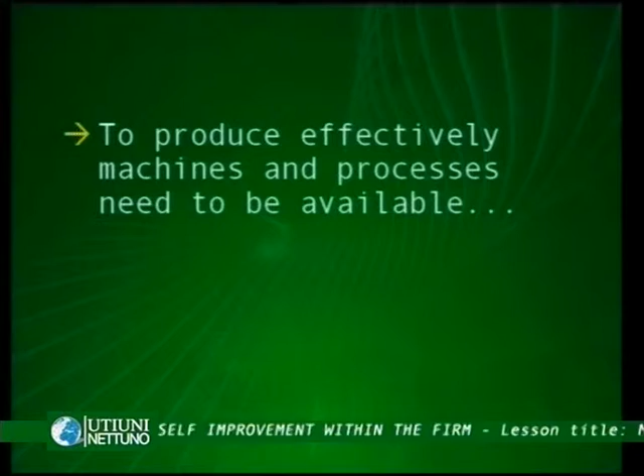Why is maintenance important? To produce effectively, machines and processes need to be available. It seems very obvious, but to be competitive, to be efficient, to build your capacity, your machines need to be able to do what they are supposed to do when they are supposed to do it. To achieve this, they must work and work well when they are needed.

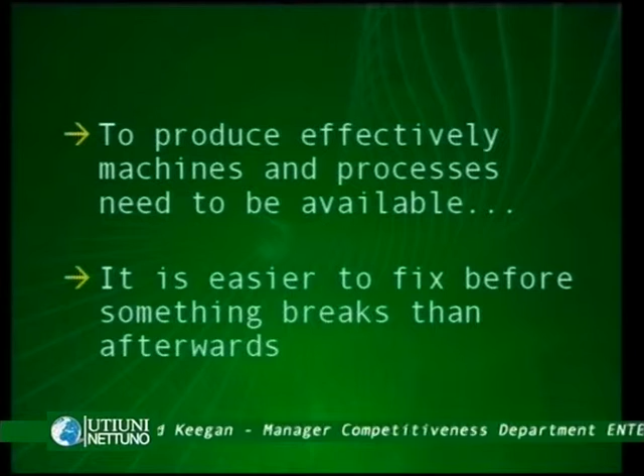It is easier to fix before something breaks than afterwards. If you take the simple example of your bicycle, it is often easier to adjust the tension of the drive chain before it gets caught in the wheel than it is afterwards. It's certainly less messy. The same idea applies in industry. If we can adjust our machinery and keep it running properly before it breaks down, we can be more effective and efficient, and spend less time trying to fix problems as opposed to making sure they don't happen in the first instance.

Adjusting is always cheaper than replacing. If it's possible to make small adjustments to a machine or a process or a piece of equipment, it is much cheaper than buying new parts, which are often difficult to get. So it's much easier to adjust than to replace.

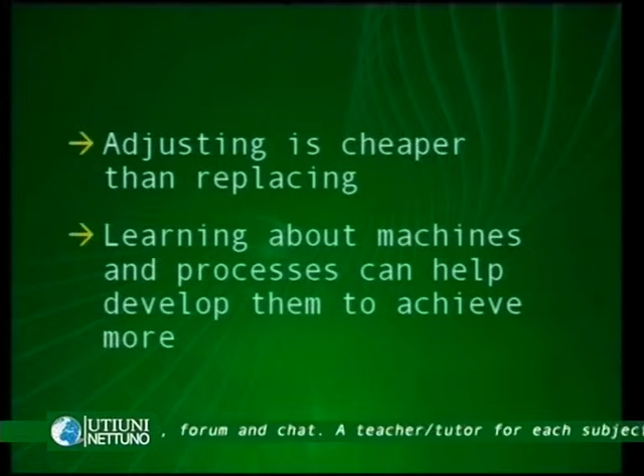Also, learning about machines and processes can help develop them to achieve more. Most machines are built by machine makers, but very few of these machine makers have the experience of running machines in a production environment. As you and your team build your capacity, your ability and your understanding, it's quite possible that you will find ways to improve the machinery to make it better than that delivered to you by the machine maker, because you will have increased your understanding of how the machine should work, as opposed to how it was designed. The only way to achieve this, however, is by learning about your machinery and trying to understand its concepts and its basic fundamental structures.

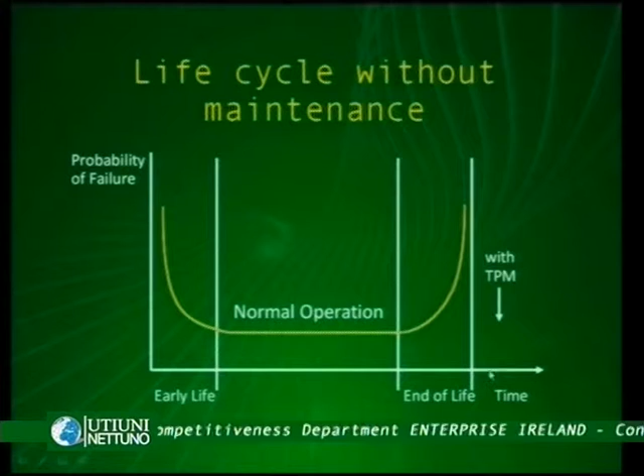With a concept called total productive maintenance, basically the use of good maintenance practices, we can reduce the probability of failure over time. In our next graphic, we will describe this.

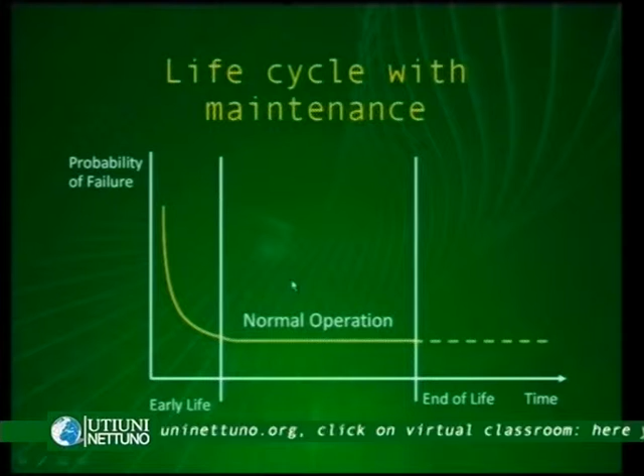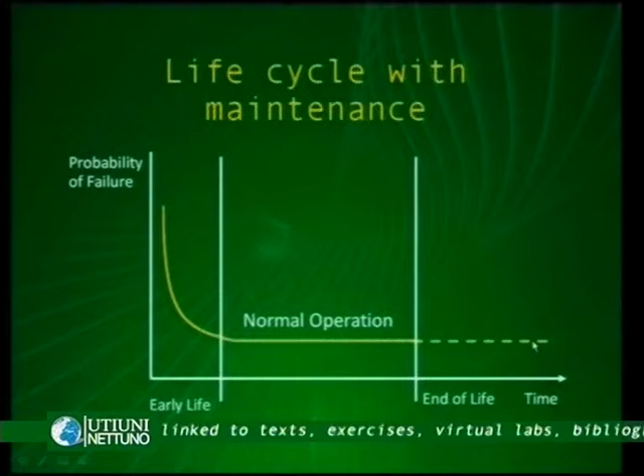Once again, we may have the situation of early stages of failure, high levels of probability of failure in the early stages of life of the machine or equipment. We will move into normal operation, but with good maintenance, it becomes possible to extend the life of the machine and the equipment to a greater degree. We call this the life cycle of the machine with maintenance.

On my first visit to Japan many years ago, I visited a company called Nissan Diesel, and I was surprised to see in their machining halls very many machines that I recognized from my early days in university. The only difference with these old machines was that they had been equipped with new measurement equipment and simple devices to allow the machines to run more effectively and efficiently with less input from the workforce.

So in actual fact, this company in Japan had found a way to extend the life of their machinery, plus also to improve its capability, because they had taken the time and the effort to develop their understanding of the machinery, as well as the concepts, as well as the possibility of making simple adjustments and additions which extended the life and the efficiency of the machinery.

There are some key principles of good maintenance. The first of these is cleaning. If an environment is dirty, it is hard to see where a problem may be arising in a machine. If a machine is leaking into a dirty environment, it is very hard to identify the source of the leak. If it's leaking, it's not operating the way it is supposed to operate.

So if we can start our proper maintenance journey by cleaning our environment, by cleaning the machinery, by cleaning the space around the machinery, we begin to get an understanding of our machines. We begin to get an opportunity to identify when something is going wrong, before it fails. This in turn helps us to adjust rather than having to replace or fix something that is broken.

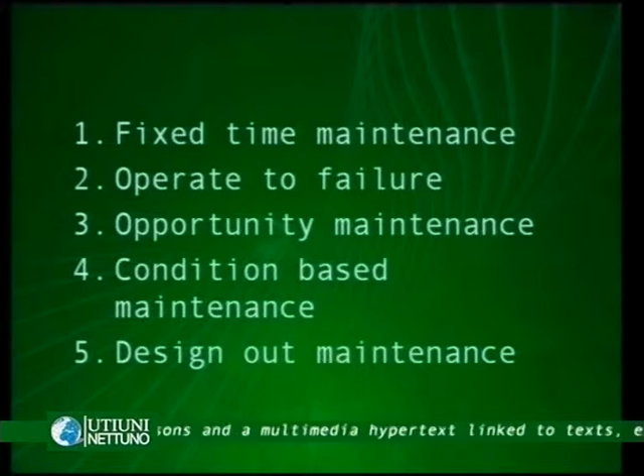Based on how the machine is performing, certain activities and actions can be done to improve the overall performance and life cycle of the machine. The fifth key type is design-out maintenance. As the name suggests, it relates to designing maintenance out of the cycle of the machine's operations. We will deal with these 5 types of maintenance in some detail during this lesson.

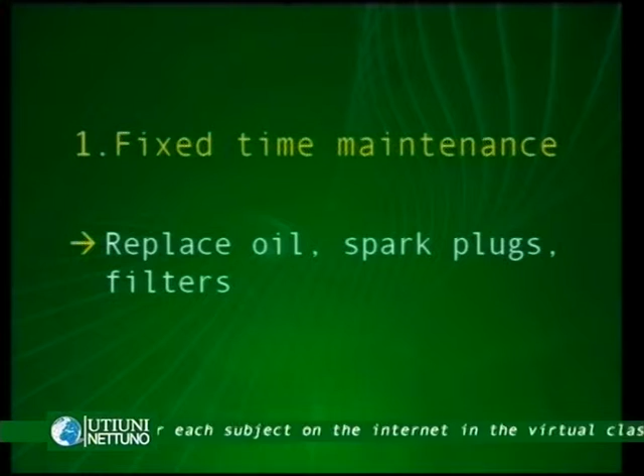The first of these types of maintenance is fixed time maintenance. We would understand that with our cars, with our motorcycles. We would replace the oil, the spark plugs, the filters at a fixed time or a fixed distance. Annual services — we understand the concept that a vehicle gets serviced annually. Oil gets replaced every 6 months or after a certain mileage.

And on this basis, if we take it into our manufacturing environment, we might do an annual maintenance of a machine. We will have certain activities that will be done to the machinery or the equipment every year on an annual shutdown. It's very normal in process industry or in the food sector.

So the machine gets certain items changed, adjusted, replaced on a time-based level.

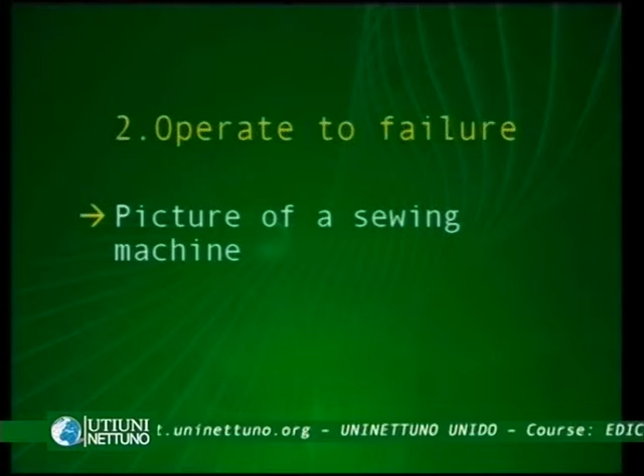In an operate-to-failure environment, it's typically used in a situation where many simple pieces of equipment can be replaced quickly. Imagine the picture of a sewing machine in a sewing factory: the machine is simple, small and light, and can be replaced very quickly. Typically, a sewing factory will have a number of reserve machines that can be put into place if a machine breaks down. The broken machine is taken aside, repaired, and brought back to operating condition, but the operator has a new, replaced machine to work with.

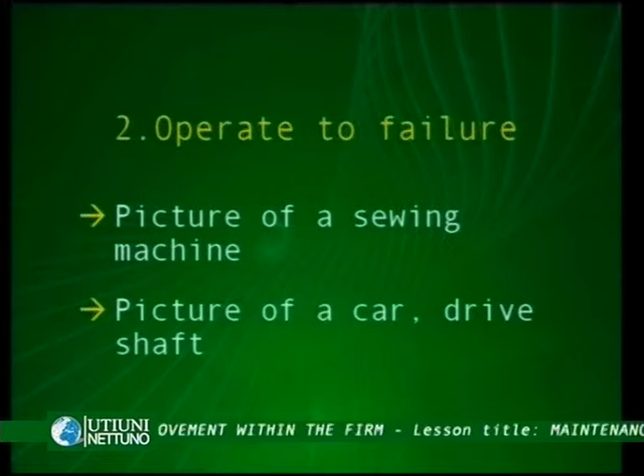If you imagine the same situation with your car, it is unlikely that you would replace a drive shaft at a particular distance or particular time. You would most likely drive the car until the drive shaft failed, until you became aware that it was going to fail in service. In that instance, you would replace it because it had failed.

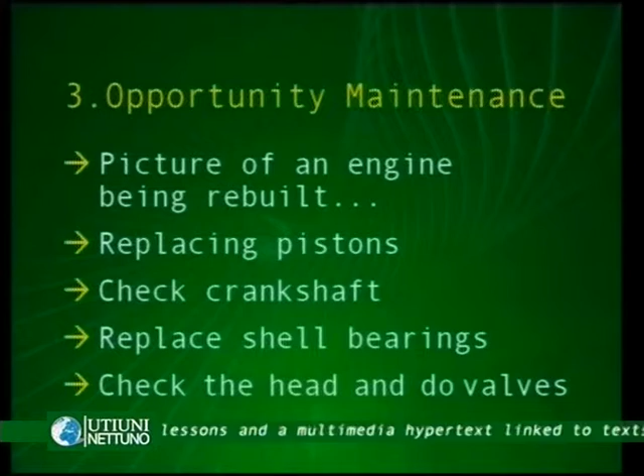The third level is what we call opportunity maintenance. Sometimes a part needs to be replaced because it is broken, and sometimes a part has gone to the end of its life. Imagine an engine being rebuilt: you may take the opportunity, while rebuilding the engine, to also replace the pistons, check the crankshaft, replace shell bearings, check the head, and do the valves. Because you have the engine removed from the car, there are probably many other tasks or checks you may choose to take on, since you've already removed the engine. You're taking the opportunity to do these other jobs when the engine is removed and disassembled.

If you take the same example into industry, if you're working on a significant machine during its annual changeover, you may decide to do a number of different checks at that time. You're taking the opportunity to do additional work because the machine is available to you and has been disassembled.

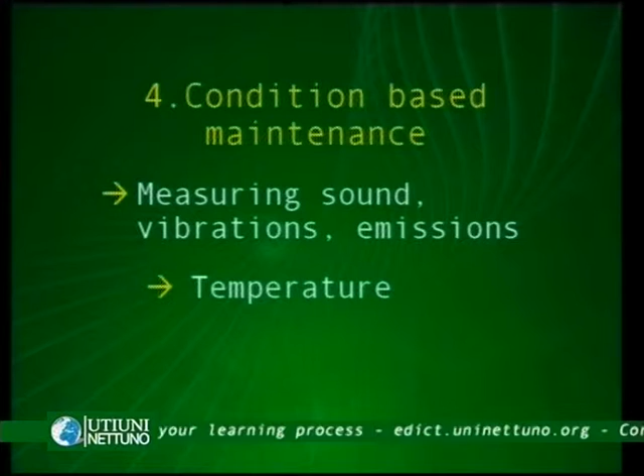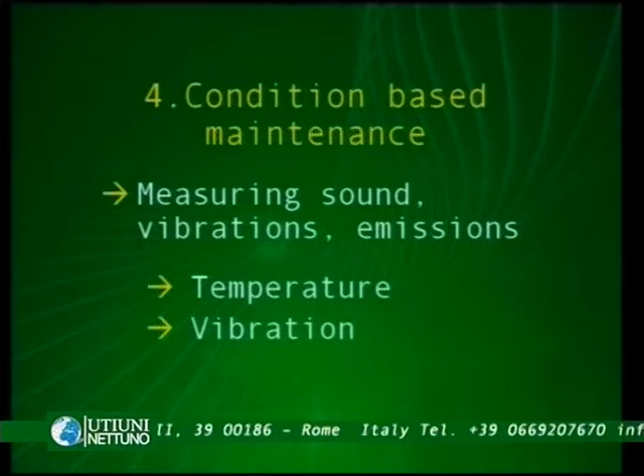The fourth type of maintenance is called condition-based maintenance. In this type of maintenance, it's about the condition of the machinery. You're moving into a reasonably sophisticated environment, beginning to look for sound, vibrations and emissions, temperature, vibration and lubricant condition. You begin to try to understand what the optimal performance level for the machine is.

In the simplest of terms, if you watch good engineers walking through a factory, you will often see them use the tips of their fingers on the frame of a machine to feel for vibrations. Half the time they don't even know they're doing it. But you will notice good, capable maintenance and engineering staff walking through a production environment, listening for strange noises, checking vibrations on machines, and being aware of changes in temperature as they walk past. They actually care about their equipment, they've come to know and understand it, and they are sensitive to changes.

Many years ago, I was working with Nestlé on a sweet-making machine for bonbons. The ladies who worked on that machine every day could tell me, as the engineer, that there were issues arising in the machine long before we, as the engineering team, would have become aware of it. This was because they noticed changes in the sound, the vibration, the smell or the feel of the machine. It's very important to be open to your people working in the factory, so they can share things with you. They may not know the exact technical term or issue with the machine, but they might well help you identify a leak, a noise, a corrosion, or some other change in the machine, giving the maintenance engineering team the opportunity to adjust it before it breaks.

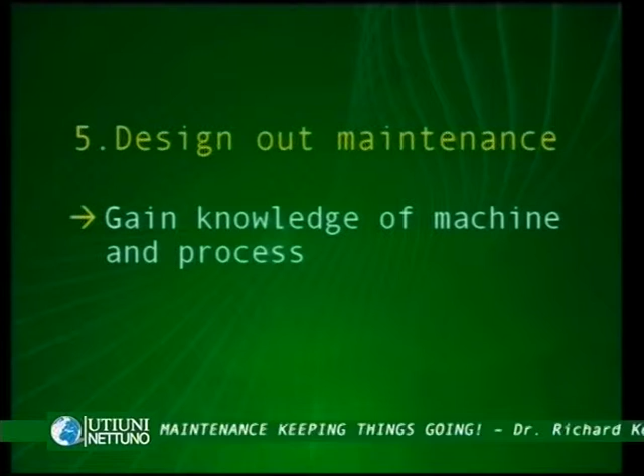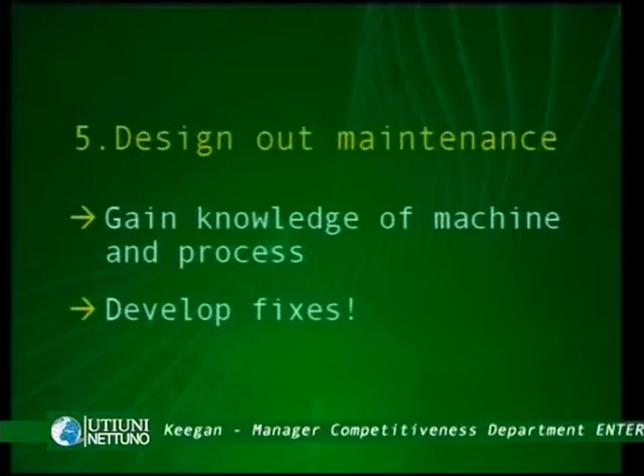Design out maintenance, the fifth type of maintenance, refers to designing out maintenance. This can only be done as you gain knowledge of your machine and your process. I referred earlier to the point that machine makers do not usually have much experience running machines, whereas those of us who work in a production environment have a lot of experience in the day-to-day use of the machines and how they operate within a manufacturing environment.

As we gain knowledge of our machines and processes, we may find things that break on a regular basis. If we can communicate with our machine makers, we can give them information so they can design out those problems in the next iteration of the machine.

If we have the skill, ability, and resources within our own operation or a local supplier of parts and components, it may be possible for us to create pieces of equipment or replacement parts that are stronger or more capable than those supplied by the original machine maker. It's only possible to do that if we gain knowledge of our machine and our process.

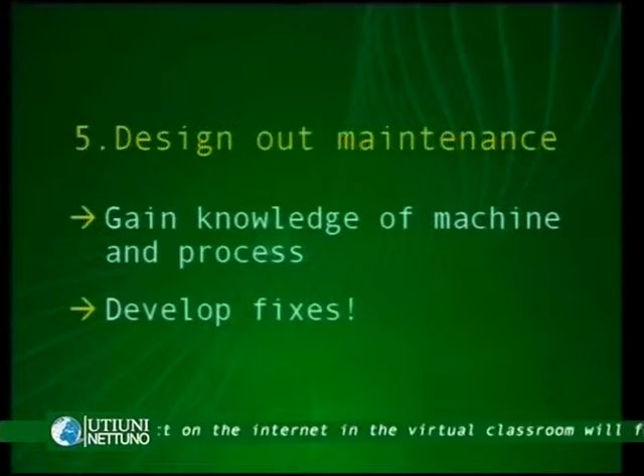That in turn gives us the opportunity to develop fixes, which gives us the opportunity to improve the performance of our plant, equipment, and effectiveness and competitiveness, while building the capacity not only of our equipment but most importantly of our people - our engineering, our maintenance people, and our local supply base. This development of fixes can give us a significant strategic advantage over companies who choose only to keep and run machines as delivered by their makers.

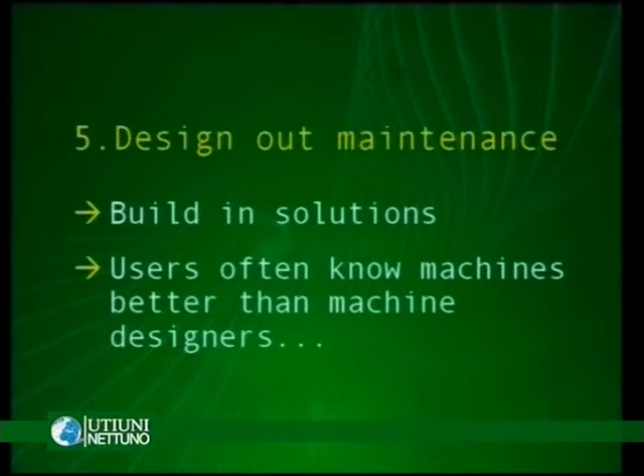As we build this knowledge, we get the opportunity to build in solutions. We will certainly know more than the people who design the machines. The potential could arise where it becomes possible for you to share your idea with the maker of the machine, or even to sell the concept to them. But it all comes from a basis of knowing your machines, understanding your processes, and building your capability to run the machines effectively and efficiently.

We will now talk about organisation structures and how to organise your people in the maintenance and engineering areas.

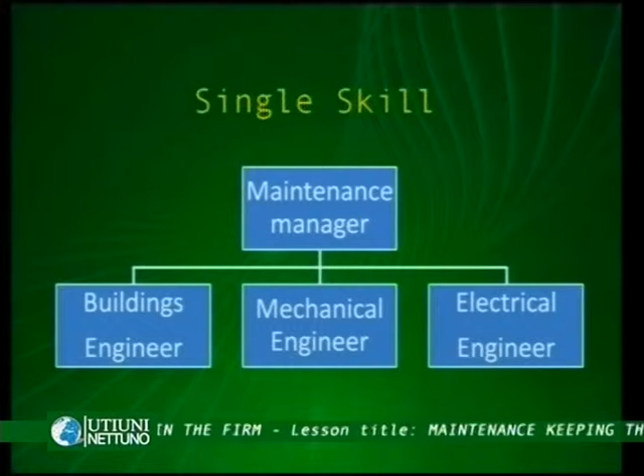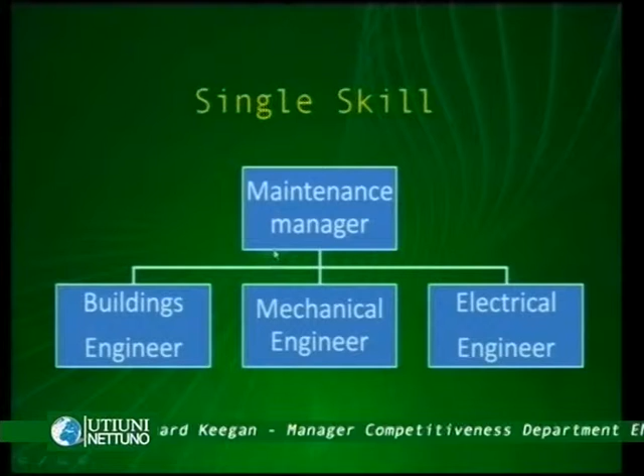Some businesses operate in what's called a single skill environment, where a maintenance manager has individuals focused in buildings engineering, mechanical engineering, or electrical engineering. This is a traditional way to organise the team in a maintenance function, where people have a single skill and focus on a single given area.

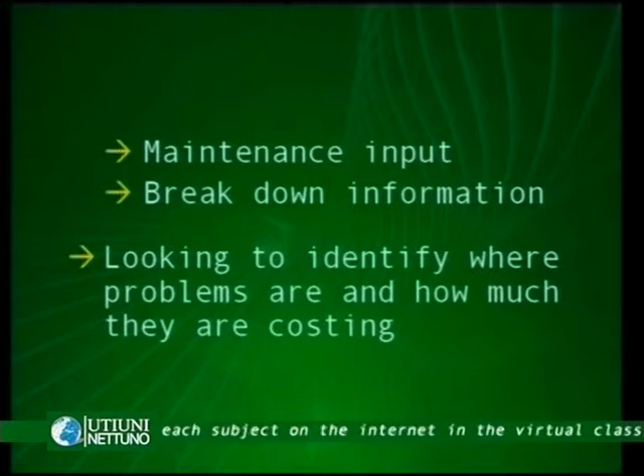We are looking to identify where problems are and how much they are costing. Quite often it's difficult to remember what happened last week or last month without having captured these types of records. If at the end of the year we are trying to decide our budgets or trying to plan for next year, without having the facts of where our problems arose, where our breakdowns occurred, where our spend went.

In terms of spare parts and availability of time of our maintenance team was spent, we are guessing. And in actual fact, the plant register can help us to have facts to help us make the right decisions. We are, throughout the UNIDO SPX system, looking to capture facts so that we can deliver better value to our customers, but also retain more value into our businesses themselves.

To help us capture the facts in a clear and coherent way, we would suggest the use of what we call the measles diagram. The measles diagram - what is it? It's a support to the plant register. We would suggest that you draw an outline of your factory, of your offices, and on the outline, draw in the key pieces of equipment. It does not have to be a detailed drawing - a simple block diagram can be used.

Each time a piece of equipment has a problem, put a simple dot onto the page. We would suggest using a red pen, simply for the fact that it highlights there is a problem at that particular point.

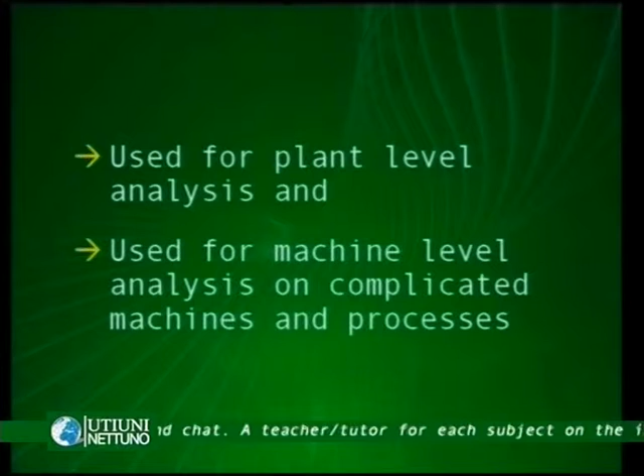But the measles diagram can equally be used at machine level for analysis on complicated machines and processes. In many processing plants, our equipment is not simple. It can be difficult to identify which part of the machine failed if the record only shows the machine had stopped.

Draw a simple diagram of the machine. Give this to your operator. Ask the operator or the maintenance team to put a dot, the measle, on the sketch of the equipment to show where the problem was. Over time, this dot, this measle, can help you identify where you need to fix, where you need to focus.

At the plant level, it's clear - it may need capital equipment, it may need to replace a machine, it may need to change the process. At the machine level, it may mean a part needs to be replaced or a part needs to be redesigned so that it will not break down going into the future.

The system was initially used back in the days of war, where they would analyze aircraft returning from conflict. They would identify where the holes were on a simple diagram of a plane. The question was, where would they armour the plane? They chose not to armour where a plane had come back and there was a hole - they quickly identified that they needed to armour other particular parts of the plane so that the plane returned home.